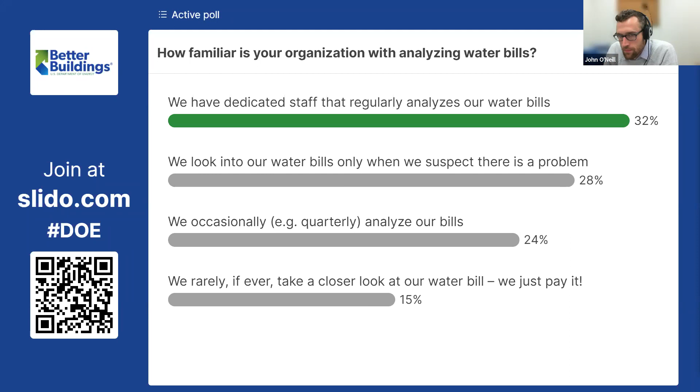All right, Justin, you can go ahead and move on to the next poll, please. And I think this is our last one. So what are the barriers that your organization experiences related to understanding and analyzing your water bills? So this is a short answer. I think we might get a little word cloud up here, maybe just a running list. What are the things that prevent you from spending that time, from dedicating those resources to getting into your water bills and understanding your usage?

Looks like time is a big one, and just resources, staff, etc. I saw complexity in there too. We've got a lot of information coming today that should hopefully help you parse through some of that. Incomplete bills, not enough information provided. Interesting. Time and resources looks like a really common one. This is great. Different bill formats. So maybe across your portfolio, maybe you've got different utilities that have different formats, and it's tough to parse through that. Low cost is an interesting one. Yeah.

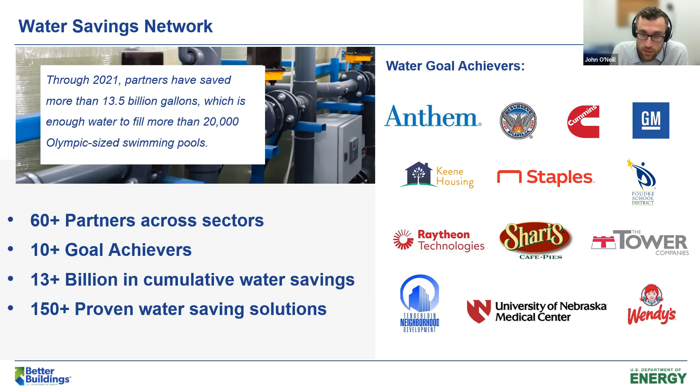So really, this community of companies and organizations that is driving water efficiency and committing to sharing their best practices and their data is really making a huge impact. And we're really appreciative for all of our partners, in addition to these goal achievers listed here. Over 13 billion gallons in cumulative water savings and over 150 solutions published on our Solution Center. Next slide, please.

So again, just to wrap up, the Water Savings Network is a way for partners to engage with DOE to track a water reduction goal across all or a portion of their portfolios, or to participate in peer exchange activities and gain recognition for solutions. Water efficiency is really important, not just for the operating costs, the reduced cost of your water bills themselves, but also the reduced cost of energy to transport and heat and cool that water, as well as to pump it around your facility. Being more water efficient increases reliability, improves water quality, and is a really valuable activity for your organization to prioritize.

Again, the commitment is flexible, but you commit to participating in water-based Better Buildings activities, such as tracking and reporting water data, publishing solutions, or sharing best practices and lessons learned in a variety of formats with your peers. Next slide, please.

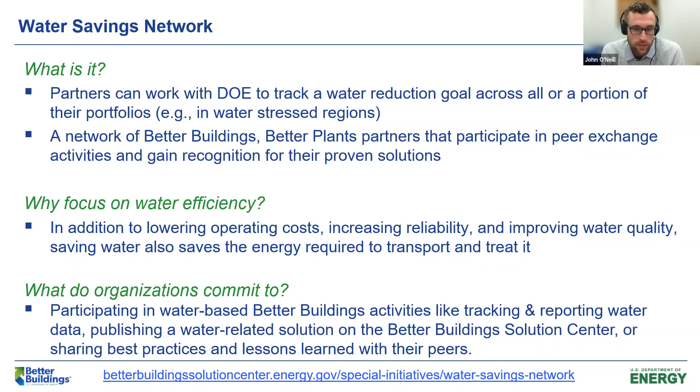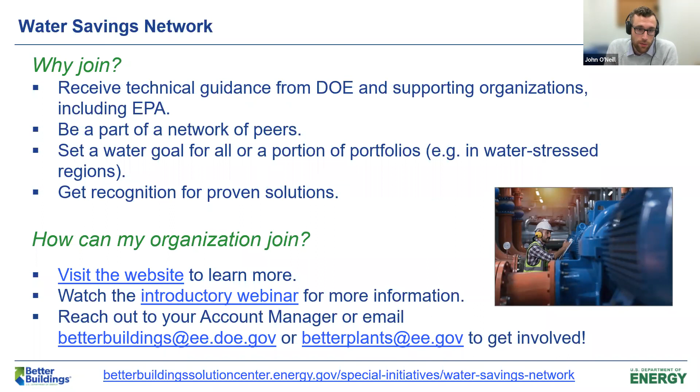Again, super easy to join. Visit our website, reach out to one of us. We'll have contact information at the end, one of our Better Buildings or Better Plants website or email addresses listed at the bottom there. And then we've also got an introductory webinar that you can check out for a little bit more detail in addition to the information I gave here today. Next slide, please.

Alrighty, we have got a great lineup of presenters here for you today. We have Alex Botts of Oak Ridge National Lab and Don Nichols of Carlisle, Wendy's company franchisee. First up, we have Alex Botts. Alex Botts is a research associate at Oak Ridge National Lab for the Manufacturing Science Division and is a technical account manager for the US DOE's Better Plants program.

She completed her bachelor's and master's in industrial engineering from West Virginia University. During her education, Alex worked at the West Virginia University Industrial Assessment Center, conducting energy assessments and research on small and medium manufacturing facilities. Her primary focus of research was on twin tower desiccant compressed air dryers. Mrs. Botts is continuing her research in energy intensive systems found in manufacturing with an emphasis on compressed air systems. Alex, go ahead and take it away. I'm going to hand it off to you to kick us off.

Great, John. Thank you so much for that introduction. I appreciate it. So my name is Alex Botts, like John said, and I am a technical account manager for the Better Plants program. So hopefully some of my partners are on the line. I will be asking you about it if you are.

But today I'm going to be talking about understanding your utility bills and particularly your water bill. So I'm going to start off talking a little bit about the program, just so you have an idea of where we're coming from. I'm then going to talk a little bit about water bills, what to look for, the most common things you might find on a bill. And then finally, I'm going to talk about one of our software tools that you can utilize to analyze your bill. So we are going to go through all those portions during this presentation.

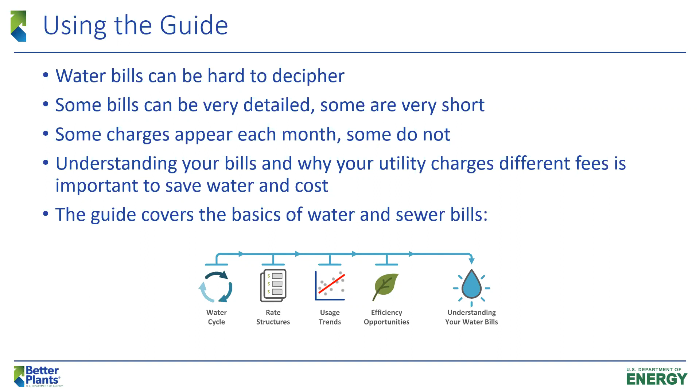It's important to understand how to read your bills just so you're able to better use your resources and your cost, right? So the guide itself covers the basics of water and sewer bills. And I do like to point out that this is only for utility water. So if you self-source your water, we did not cover that. That is outside of the scope of this document. So if you collect rainwater or you collect your own source water or maybe well water, we did not cover that in this document. This is aimed more towards utility-based water.

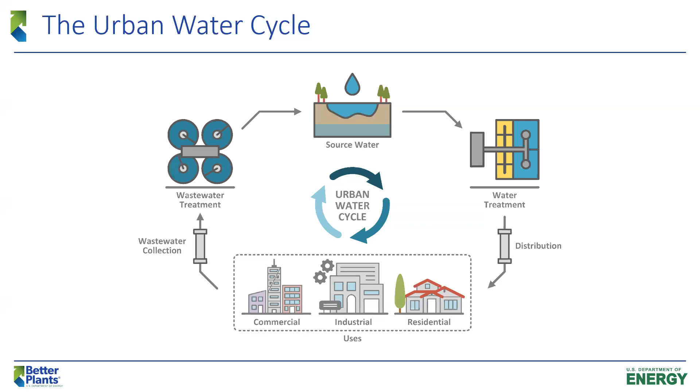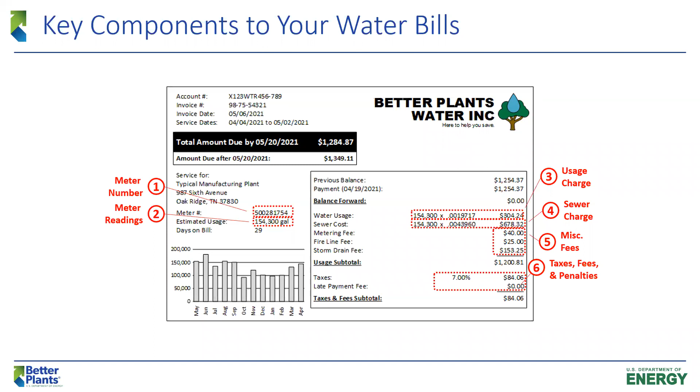So I'm going to talk about some of the different parts of the bill, so some of the key portions. So the first is going to be your consumption charge. You'll see here that your consumption or usage charge, either can be used on a bill, is the total volume used at your facility, whether that be residential, commercial, or industrial, right? Typically in the US, we see this measured in gallons or cubic feet of some sort. So it might be 1,000 gallons, it might be 100 cubic feet, but those are typically the units you're going to see.

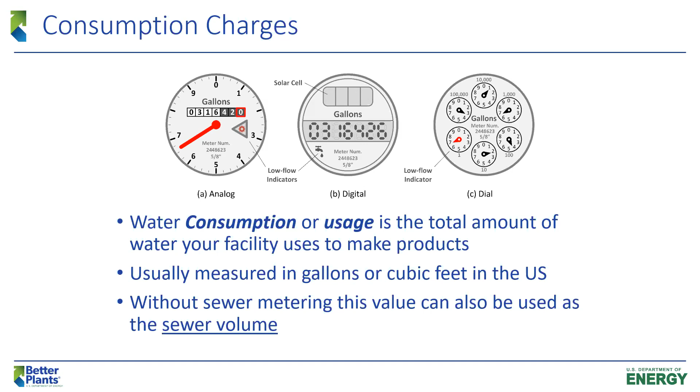Each of these will have a unit of some sort. It tells you the gallons or cubic feet, a low flow indicator, a meter number, and usually a meter size of some sort. Next slide.

The next most common charge you'll see on your bill will be your sewer charge. So again, like I said, without a sewer meter, water in equals water out. If you do use a lot of water, then we do recommend you ask about a sewer meter. So a facility that uses a lot of water might be industrial of some sort. So maybe you make beverages and you put it inside your product. Maybe you have a commercial kitchen and you do a lot of baking and you evaporate all that water, right?

So if the water isn't going back into the sewer, you can either look into an evaporation credit, right? If you can calculate and prove how much is being evaporated, or you can look at getting a sewer meter to help actually meter the volume of water.

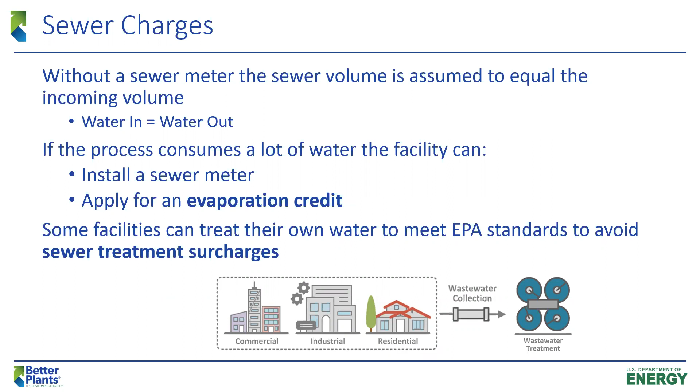Some other facilities may also be able to clean their own water and skip that wastewater treatment, or be able to avoid the sewer treatment surcharges if the water is so dirty. Typically, you see this in more industrial facilities where they can clean the water themselves and then discharge it back into the source water. Next slide.

Speaking of industrial water and sewer, we like to point these out for the industrial customers because sometimes they might not know about these options. So the first is going to be industrial water. Industrial water is not as rigorously treated as regular municipal water that you receive at your home. It can be used for process water for non-sensitive products.

So maybe you're washing a product or you're washing parts and you don't need the top tier cleanest water, right? Then we would recommend maybe looking into industrial water. This will cost less than municipal water. So this would actually save you money if you're able to use this type of water.

Industrial sewer, on the other hand, is the opposite. Industrial sewer would be the raw water leaving the facility. It is extra dirty, right? So it's not like the typical water you would see leaving your home. This treatment process is longer, much more involved. It costs more money for the treatment facilities to do.

And it's used when the water is too contaminated for regular municipal treatment. And this will cost more than municipal sewer. So if you're able to clean your own water, you can avoid those charges. Industrial water and sewer is not always available, but you would have to talk to your utility provider to find out. Next slide.

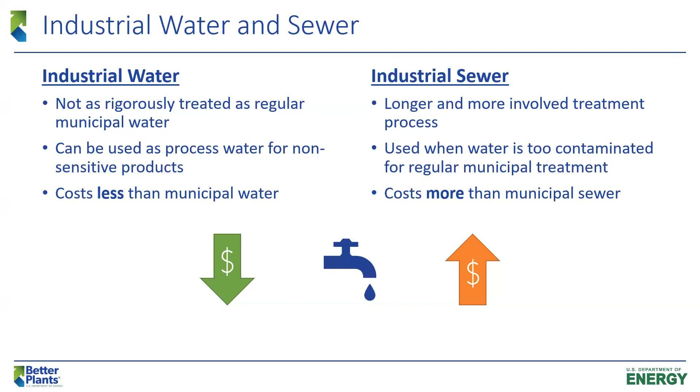The next part of the bill that we like to point out would be your riders and fees. These are usually several charges listed on your bill. Riders are considered modifications to your rate structure, so there's something on top of your volume charges. Usually these are very descriptive and they serve a very specific purpose, right? To change a tariff, it's a big deal. So it's very descriptive what the charge is going to.

The next was a fire line fee, so that guarantees water is available in case of a fire. Standby fee, which is similar to like a demand response in energy. And then finally was that sewer treatment surcharge. So if your water is extra dirty, you're going to be charged for that extra dirtiness. Next slide.

You might have a customer fee or a meter fee. Sometimes those are used interchangeably. You also might see late payments or insufficient funds. So when we say maybe a little planning to help avoid it, that's what we mean. Pay your bill on time, and you would avoid that charge.

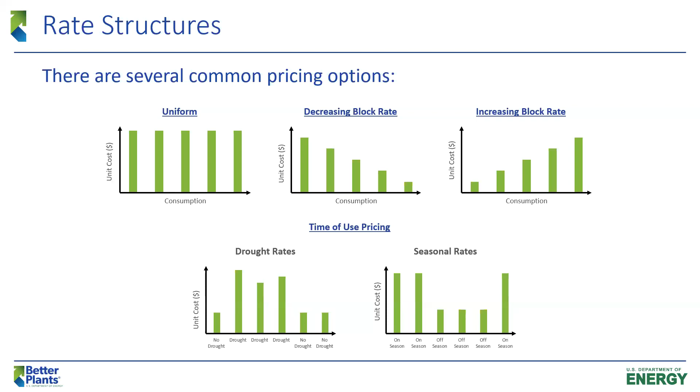The other one we saw was seasonal rates, and that's very similar. So you might have an on-season and an off-season. Your off-season would be probably towards the winter where you have more precipitation, and your on-season would be in the summer where you don't have a lot of precipitation, right? So your cost is going to increase. And typically that's an on or off and not variable like the drought is. Next slide.

The last thing I really want to point out about the bill here before we talk about cost saving opportunities is calendarization. So this is important for all sectors, but we find it's especially important for industrial partners. And what do I mean by calendarization, right? So the billing period on your bill might vary, right? It might not be from the 1st of the month to the 30th of the month. It could be from the 15th to the 15th. And that kind of skews your monthly water.

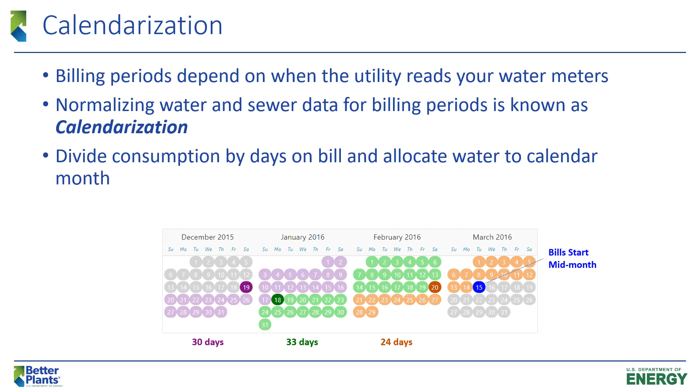So what we do is called calendarization, and it's a normalizing process where you can actually shift that water and do a little math there and calculate what would be your total water usage from the 1st to the 31st. We do have a tool that can help with this. We're working on our utility tool, VERIFI, and it will actually help you do this calculation. Next slide.

And we mentioned recreate your bills because you have one of three options there. You're going to calculate it and it matches. We're all hunky-dory, we move on. Maybe you find out you're on the incorrect rate structure and then you can get that changed and save some money, or you might find a calculation error. So again, all of these are options that will save you money without changing your volume of water.

So that was important there, and we try to focus our energy there. So that's pretty much how to understand your bill and how to read a bill, and cost-saving opportunities that you might find just by analyzing your bill. So next slide, please. Analyzing your bill. You have an idea of what's on your bill. You have an idea of what your tariff is. So now we need to look a little bit more at the analysis side of things, right? So maybe you do want to save some volume of water. What's the next step? So I'll be talking about the plant water profiler tool that we offer.

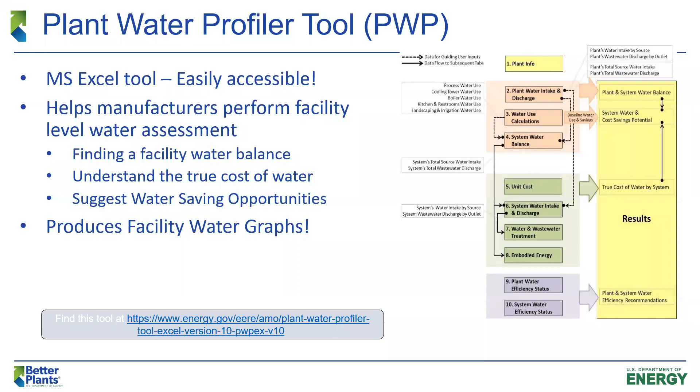Next slide, please. So I mentioned that the plant water profiler uses a 3-step process for an assessment. So the first step is going to be baseline your water use and perform a water balance. So water in equals water out. In this case, water out might mean in a product. It might mean evaporated. It might be a loss of some sort. It might be recycled within your facility. The real focus here is we want to know where your water is going. So if you bring in water, what's happening?

Is it being recirculated? What process is consuming the most? Is your commercial kitchen using all this water? Where is it going, right? The idea here is we want to match your bills, what comes in, what comes out, right? And if you're not matching, that means you have unknown losses or unaccounted for losses. So we really want to focus on figuring out where that water is going. And that way you can focus your attention on processes that might consume an enormous amount of water.

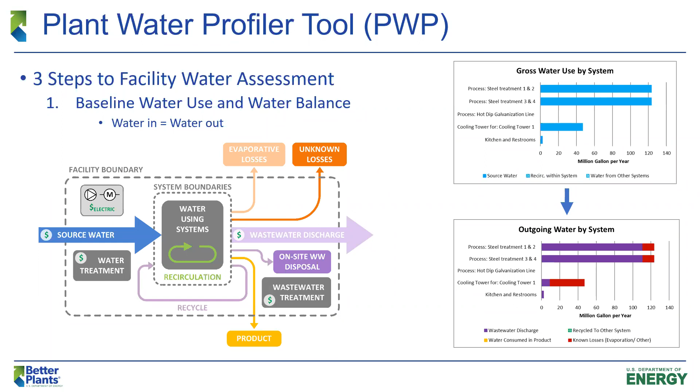Next slide, please. So the second step after you baseline is to determine your true cost of water. This is an important step. By true cost of water, what I mean is you find the hidden fees associated with water that aren't a part of your bill, right? So you'll have a unit cost, but what about moving the water? What about pumping the water? What about heating the water, cooling the water, right? Each of those will actually put more money or energy into the water, and that needs to be accounted for on top of your bills, right?

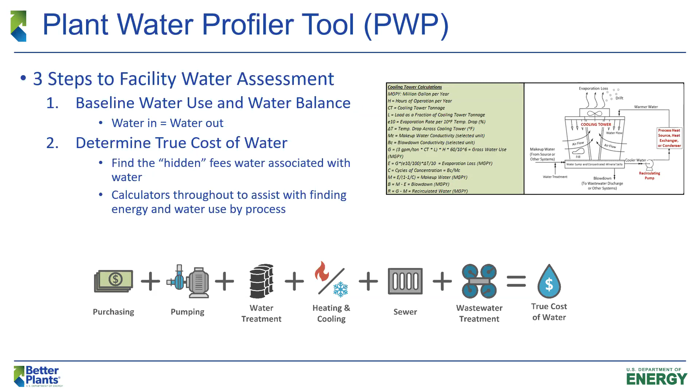So we can help you do this through several calculators. Maybe you have a cooling tower and you need to figure out how much energy is being put into the water. We do have calculators built into the tool that will help you with this calculation. True cost of water is really a great tool when trying to figure out an ROI or a simple payback for water projects, just because it gives you a better picture of what's actually happening with that water cost. So it's a great management tool. It's a great tool to use when looking at other projects and assessing the feasibility.

Next slide. And then finally, at the end of the tool, we're going to identify water efficiency opportunities, right? So you baseline, find true costs, find opportunities, right? That's why we're here. Save water, save money. To do this, we benchmark you with industry averages. So you tell us your NAICS code, and then we'll compare you and your answers to a database of other sectors and industries that we have. We'll also produce report graphs that can be very useful. I believe that graphs can speak 1,000 words, right?

Especially when you're speaking to management, you're trying to get your point across, or if you're talking to someone who is not as familiar with water or with energy, then you can actually use it to show what you're talking about, right? And then finally, we list possible saving opportunities, common opportunities you might find based on your answers, and just places for you to maybe look a little bit closer to save that water or save that cost.

And that's pretty much the tool, right? So I simplified it into 3 steps. It does require a lot of data and a lot of information, but these 3 steps are really going to give you a self-assessment that is worth your time. I like to always say you get out what you put in. So if you put in really good data, real quality data, you're going to get a better quality analysis out.

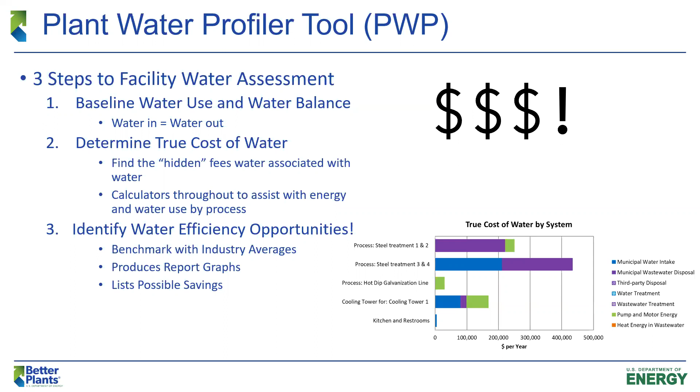So just keep that in mind as you look through this tool and you look at the example and walk through this with your own facility. Next slide. So that's all I have today, talking about water bills and the tool itself.

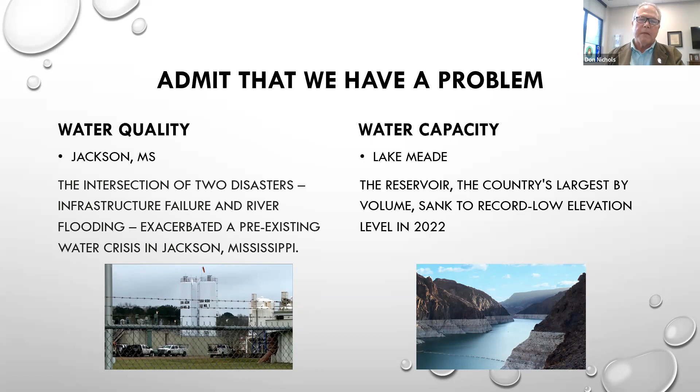So regardless of who you are, whether you're the homeowner or retail operator or a commercial establishment or an industrial establishment, you jump in somewhere. You can immediately begin learning and making a difference. Next slide.

Start somewhere. Start looking at your bills. Start familiarizing yourself with the bills. Start collecting data. You can do it individually, and you can move that collection to someone within your team. Let me speak real quickly to, I have a tremendous team of folks that have joined in. I've sprinkled some of them in water baptism, and I have immersed some of them in water baptism.

But this team can help you immensely as you raise the awareness, collect the data, identify the intensity of where you want to put your finger and what it is you want to do in actions and in capital investment. And you will begin seeing the improvements of the fruit of what you're harvesting, the difference you're making. Next slide.

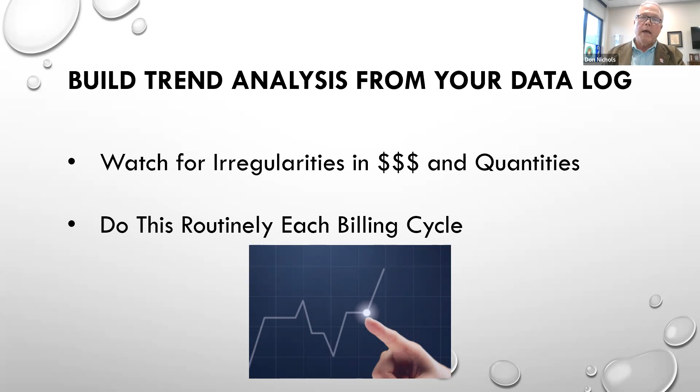You can't hit-and-miss this. You got to do it routinely. I'm not sure what that routine for you is. It could be quarterly. It needs to be at least monthly, and it could be better than that. But it's got to be routinely, and it needs to be communicated consistently. Next slide. Okay, number 6, we're halfway there.

But everybody that we talk to, remember one thing, there is no silver bullet. There is no one button fix. There's not anybody you can hire that can do this for you the way you can do it for yourself. And even if you do, it's going to be expensive.

So if you just ease into the water, start biting that elephant a bite at a time, and adding to your team and making them become believers, show your boss the financial impacts that you're making. I promise you will be successful, and you can celebrate nearly every month, if not quarterly. Next slide.

Part of this program is getting familiar with your utility provider, gathering your account information so you can speak specifically to them, how the billings are measured, gallons, cubic feet, hundreds, thousands, who they are, and whether or not they offer sewer credits when large losses occur. Understand that your billing partner makes errors too, and so do their meter readers.

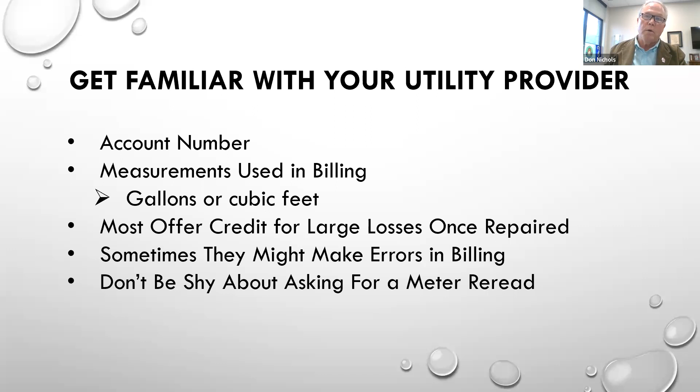So no need to be shy about asking for a meter reread, or telling them that your meter's not working, or that they need to go out and check because something on the back side of your water line seems to be a problem that's not yours. So go ahead and start having someone become familiar with your water utility provider. Next slide.

Avoid sewer fees. Sewer fees are one of the ways that they are covering their costs for water. They're anywhere from 2 to 6 times. My guess is somewhere in the United States, they're even higher than 6 times the cost of the base water itself. So whenever you can segregate irrigation water, surface cleaning water, or any type of industrial use water out of the sewer source, then you're ahead of the bill by taking that off.

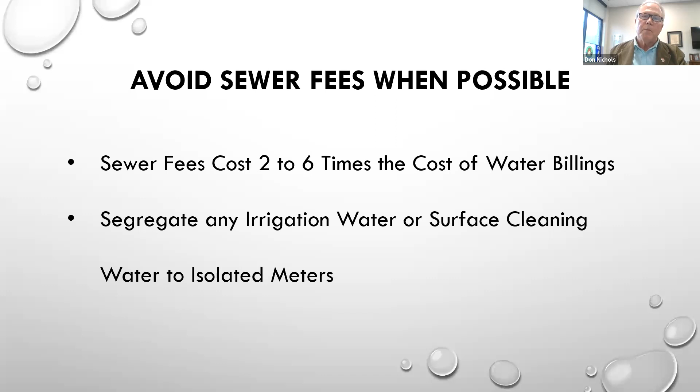You've got to look at your taps, what those cost to put in, but normally segregated taps for process water and irrigation water over time are much less expensive than just allowing yourself to combine your sewer into that domestic cost that you might be able to carve out. So go ahead and at least investigate it, and then do the math times 10 years and figure out whether or not going to that upfront expense is worth it. Next slide.

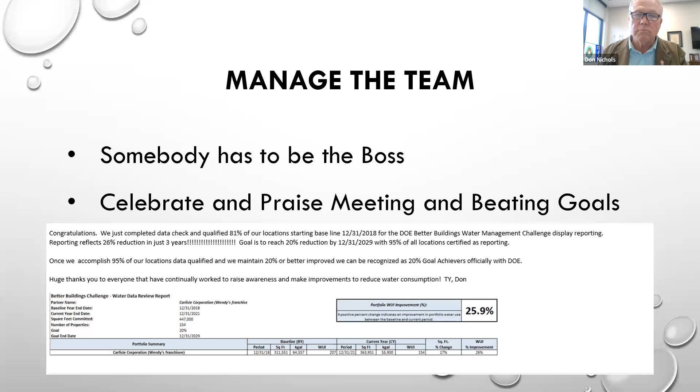Look, this BBC, DOE, and Wendy's has been extremely instrumental for us. It allows us to compare, compete, trade tricks with partners outside the organization. And just about the time we think we got it right, we have competitive neighbors that come in and show us just how much better they're doing certain things. So it's an unending quest to be better. It's an important project to protect our water resource, and at the same time can be fun. It doesn't have to take up all your time.

And by the way, once you start doing it for 5 or 10 years, you save enough money and protect that resource that you can go in and tell your boss that he ought to pay you more, because not only are you covering your salary, you're probably covering 1 or 2 of your members' salaries in those cost avoidances. I don't know how he'll take that, but the proof will be in the pudding, and he'll be happy for it. So with that, I don't think I have another slide. Next slide.

Come join us at Wendy's. We are in the Southeast. We cover 8 states, and would love for you to come see us across the nation. Dave Thomas says quality matters, treat people with respect, and we want to do the right thing. And we believe that water is one of those right things.